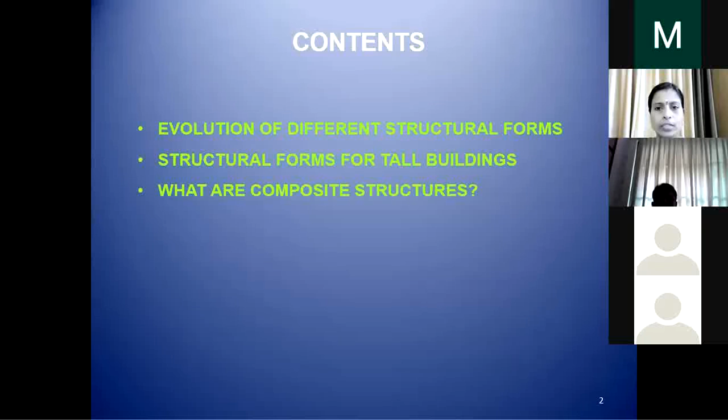There are different structural forms which have evolved from ancient times. And recently, the structural forms for tall buildings, because we are now in the process of constructing skyscrapers and other tall buildings, and we should know the structural forms which are being used for tall buildings. And what are these composite structures? What do you mean by composite structures? And what are the components? That is, what is a composite slab? What is a composite beam? And what is a composite column? And what are the other structural forms of steel concrete composite, like shear walls? We are going to see an overview of the different forms of steel concrete composite members.

Okay, so here you are seeing a reinforced concrete framed building, in which you have placed the reinforcement wherever it is necessary. For example, in order to take care of the tensile stresses, you place the reinforcements, and in some places like columns, we are putting reinforcements even to take the compressive loads. And then we go for casting of concrete, then we call it reinforced concrete. And with this, the construction has been carried out to match the number of stories required for these kinds of RC construction.

Okay. But there is some kind of limitation with respect to this reinforced concrete construction, because when we go for a high-rise building, then only the reinforced concrete columns or the reinforced concrete shear walls will not serve the purpose. When we go for more than 30 to 40 story height of the building.

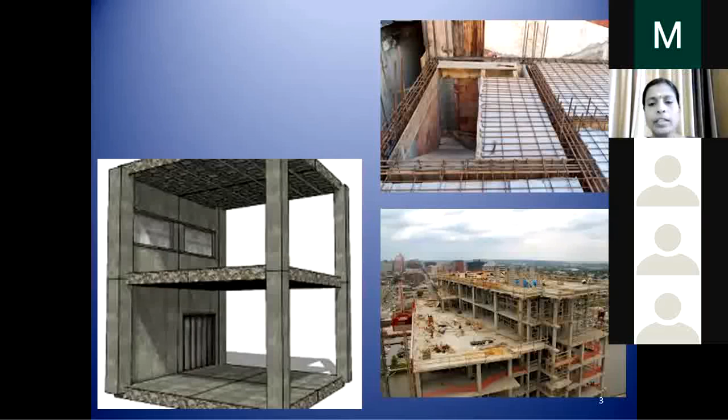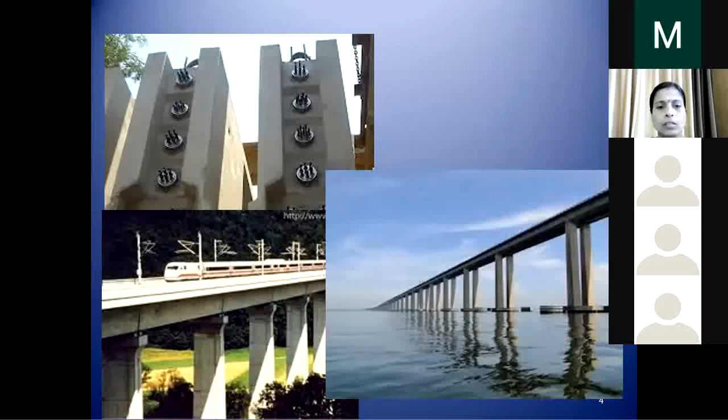So in those situations, we are going for a different form of construction called composite construction. Here is one more construction called the pre-stressed concrete construction, and this also gives us the freedom of achieving thin, slender, sleeker members than using reinforced concrete, by the process called pre-stressing. It can be post-tensioning or pre-tensioning, depending on the application and the requirement from the field. But today we are going to see only the steel concrete composite construction.

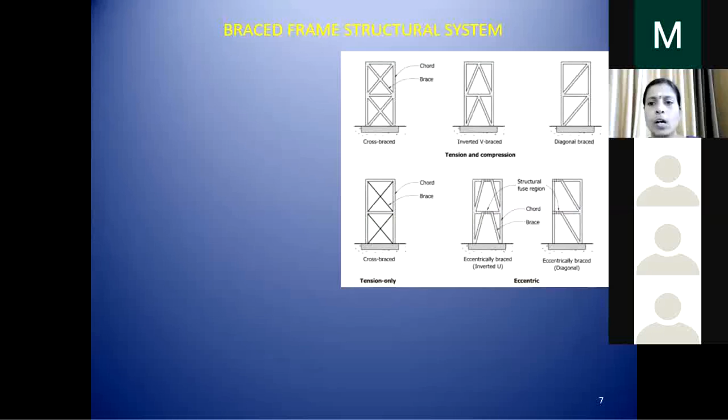These forms are generally used for tall buildings, that is, the skyscrapers. Before we get inside tall buildings, we'll see what systems or structural forms are used in tall buildings. These tall buildings can be either a cross braced building frame, or an inverted V braced building frame, or even a diagonal braced building frame.

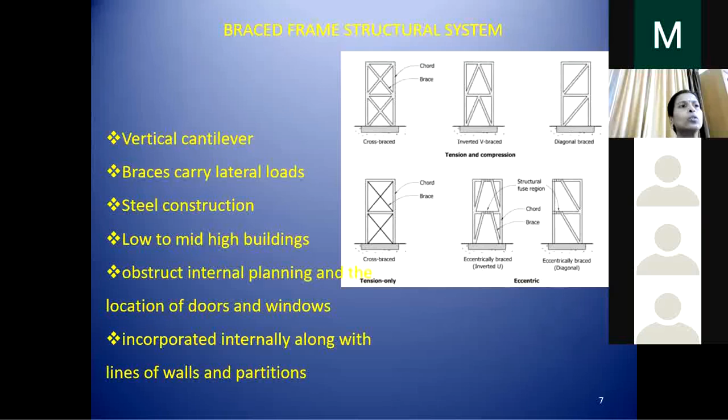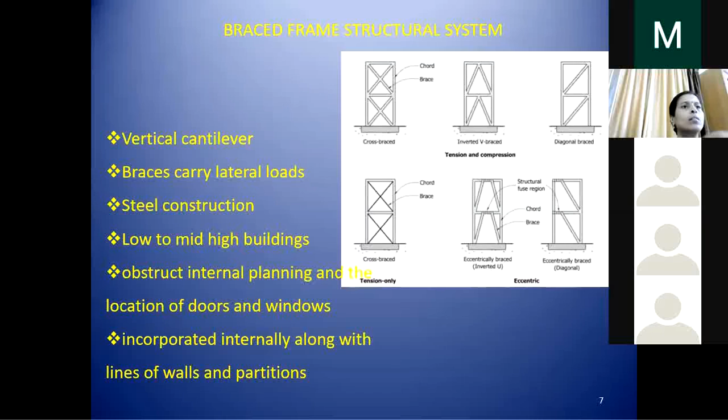These vertical forms act as vertical cantilevers, and the enormous lateral load induced by the wind is carried by these braces. The structural steel members take these lateral loads by means of the lateral bracings. These forms are suitable for low to mid height buildings, from 40 story to 60 or 70 story buildings. These braced frames are incorporated internally along the lines of the walls and the partitions.

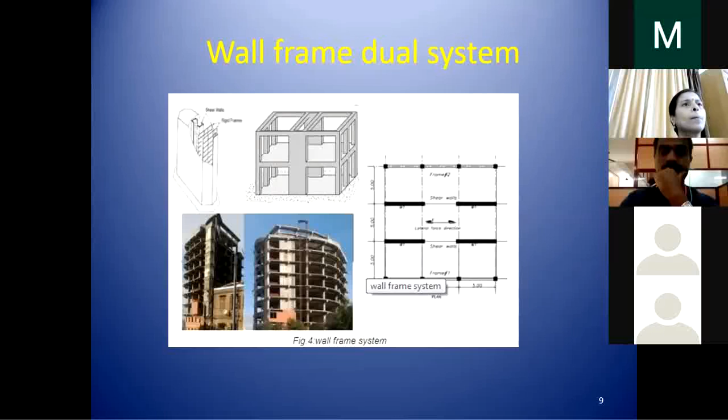This shear wall system is a very well known type of system, and it is even adopted in RCC frame structures. These shear walls are the lateral load carrying members which attract the lateral forces due to the seismic event as well as the wind forces. This one is the tube structural system. The exterior columns and beams are placed in such a way that they create a rigid frame, and it behaves as if it is a hollow tube.

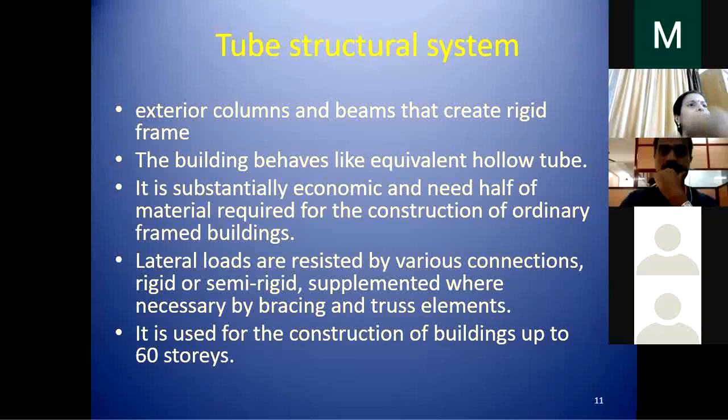And we all know the structural behavior of a hollow tube in resisting torsion as well as the twisting moment. So this behaves in a very stable manner, ending up with very good lateral load resistance by various connections, either rigid or semi-rigid. This tube structural system can also be supplemented with necessary bracing and truss elements if the design requires. This type of tube system is used in buildings up to 60 story. There are also bundled tube systems or trussed tube systems. For example, the tube in tube construction is provided with trusses along the tubes, so that the system becomes much more stable in resisting the lateral load.

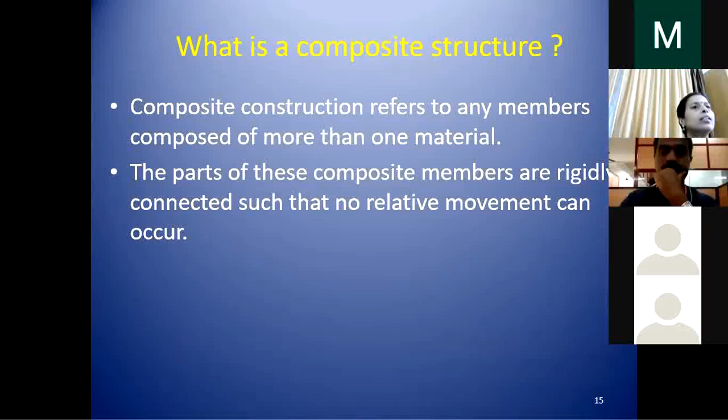Now, with that introduction on tall building configuration, what is a composite structure? When do we call a material a composite? When it is made up of more than one material. Here, by composite structure I don't mean reinforced concrete, because reinforced concrete also has two materials, reinforcing steel and concrete. Here I'm talking about two different structural forms: one is the reinforced concrete structural element, and the other is the structural steel element. The parts of these composite members are rigidly connected such that no relative movement can occur between these two members. That is called a composite structure.

So the definition states that composite construction, within the context of buildings and other civil engineering works, implies the use of steel and concrete which are formed together into a component in such a way that it results in an arrangement which functions as a single item. So you have a steel component as well as the reinforced concrete component, and these two will behave as a single unit, and that component or structure is called a composite structure.

So here the aim of combining these two structural forms is to have a higher level of performance than would have been the case with two different materials functioning separately. All of us know that reinforced concrete is good in taking compression, or we can design the reinforced concrete to take a good amount of compression, but in tension we have to rely upon the reinforcement, and when the tension exceeds a certain limit, those members cannot be designed in reinforced concrete. Then we go for taking the help of structural steel.

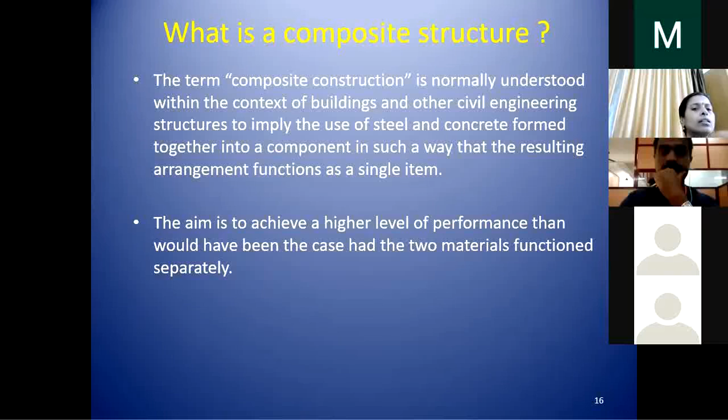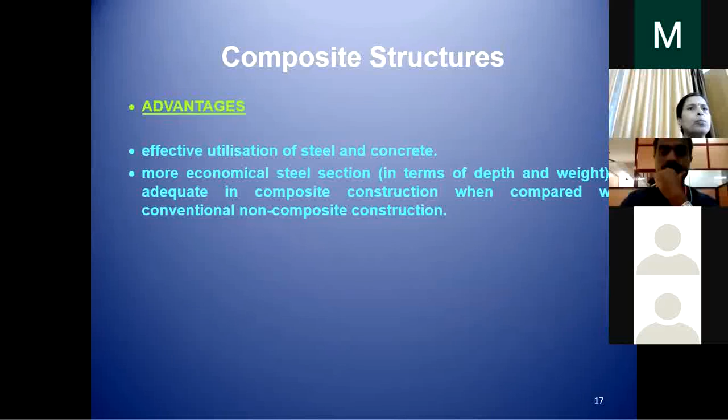So here the composite structures have many advantages. That is, they effectively utilize steel as well as concrete. Both materials, the structural steel and concrete, are effectively utilized in these composite structures. Hence, it ends up in a more economical steel section in terms of the depth as well as the weight, and therefore compared to a structural steel element, if we take advantage of the compositeness of reinforced concrete and steel, we can have a more economical steel section.

So for example, you may have a rolled I section for the beams, on top of which you may have a concrete slab, cast in situ, or sometimes a precast concrete slab. When this concrete slab, which is lying on top of the steel beam, is considered to act monolithically with the steel beam, then there is going to be adequate reduction in the depth as well as the weight of the composite beams.

Next one is the enhanced headroom due to reduction in the construction depth. For a given span of a building, if it has been designed with a composite beam, then there is going to be more headroom, and because of that your construction depth is reduced, and no formwork is necessary.

The previous work with respect to formwork, shuttering and other things is avoided, due to the composite action of steel and concrete. Due to the composite action there will be less deflection, and for a given span we can decide on a composite structure with smaller sections, more efficient in arranging the cover to a large column-free space.

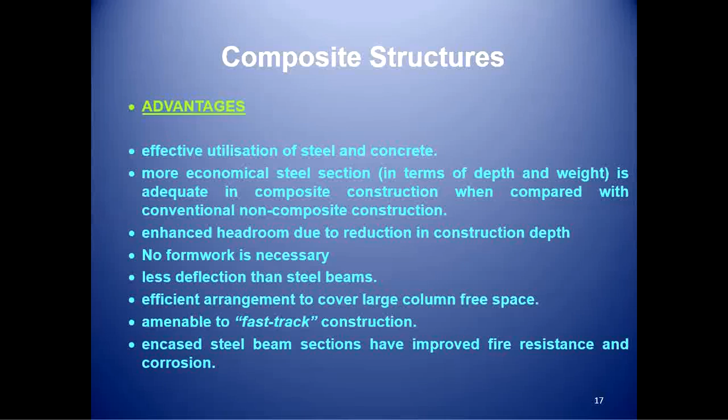So no formwork is required. I'll come to you why no formwork is required for these cast in situ slabs. And shoring can be avoided. Unlike your concrete construction, the entire shoring and shuttering can be avoided.

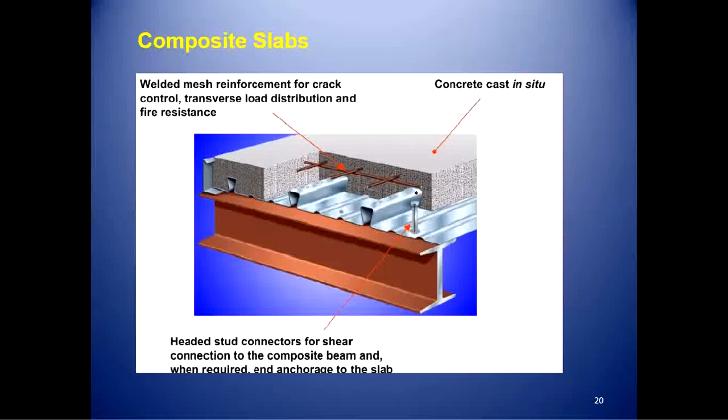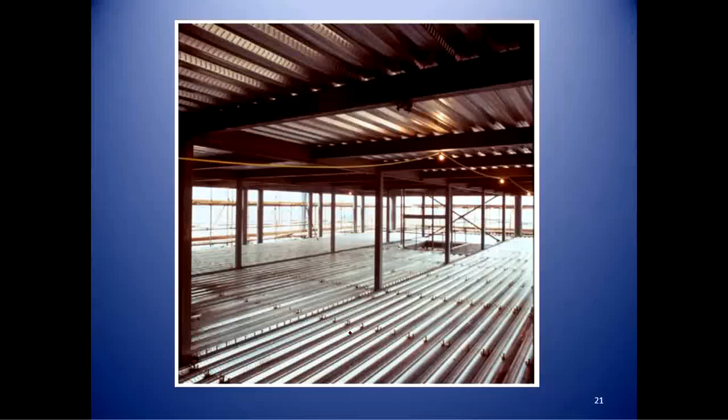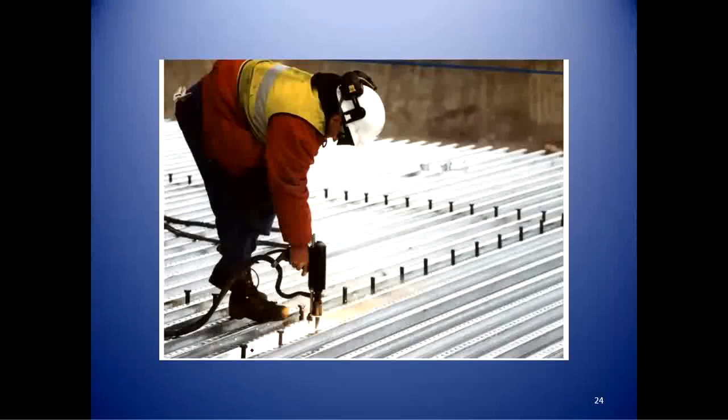So here, this picture is showing you metallic shooting guns, like welding guns. These are all the metal shooting guns, which are useful for installing the metal shear connectors, or the studded shear connectors with the headed studs. So you shoot it at regular spacing intervals, and these shear connectors will be placed on top of the flanges of the steel beams. It will pass through the metallic decking and then be placed on top of the steel beams.

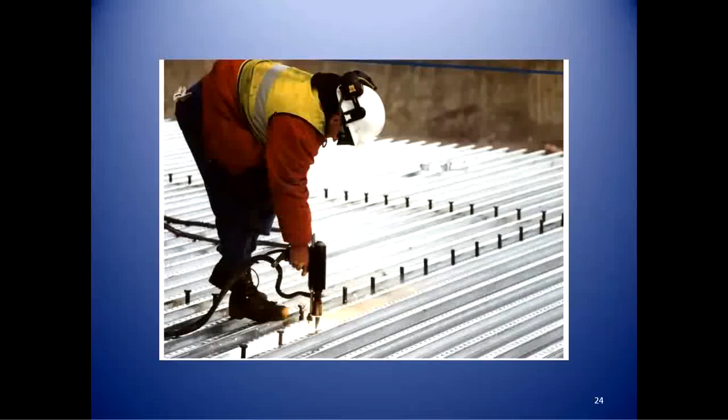The thickness of these metallic steel sheetings will be only in the order of 0.9 to 1.2 millimeters. So they are very, very thin metal sheets, but the moment of inertia is higher due to the folded forms. Hence, it is able to serve as a permanent formwork for placing the fresh concrete on top of it. And here you can see that the space provided below the metallic sheeting can be used for taking up the service ducts.

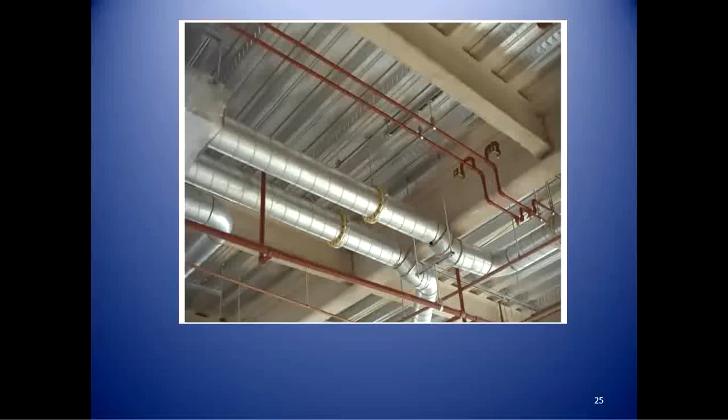So here the entire depth, the full depth of the concrete slab, can be considered when the ribs are running parallel to the beam. Whereas when the ribs are running perpendicular to the beams, you cannot ensure that the entire depth of the concrete slab is participating in the composite action. So there is a reduction factor given in the code of practice in order to account for these ribs which are running perpendicular to the cross sections. So the design has to be done accordingly, whether the ribs are running parallel or perpendicular. Accordingly, the beams have to be designed carefully.

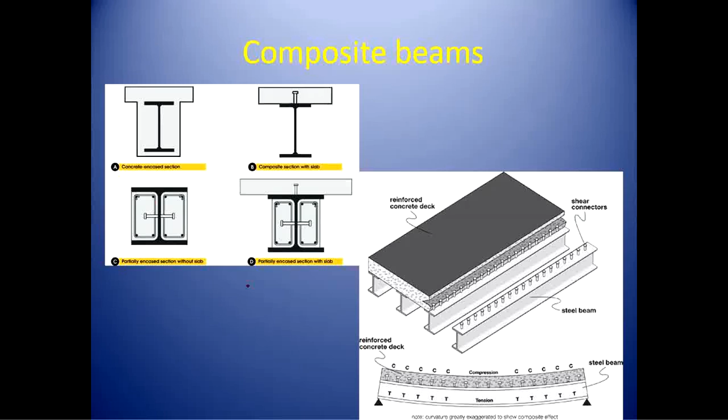So this is another partially encased section without the slab. You see here, this dark one is your structural steel, and this web portion is filled with the concrete, and this is your shear connector, which is placed in the web portion, whereas here you can see the shear connector is placed on the flange portion, and here the shear connectors are placed in the web portion to have a proper interaction between the concrete and the structural form. So this is one picture which I already discussed, how we are placing the studded shear connectors.

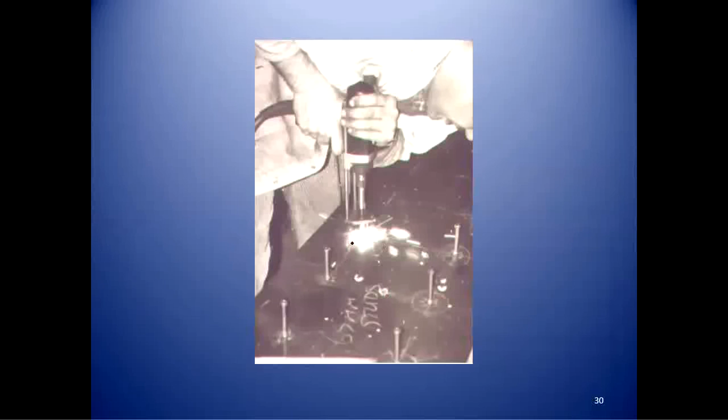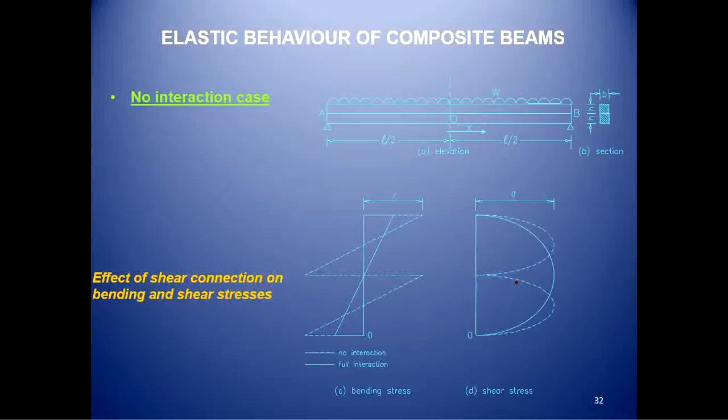Suppose there is an elastic behavior of the composite beam, then the maximum bending stress is given by 3WL squared by 8BH squared, and the shear stress is given by 3WL by 8BH. I think with the basics of your structural mechanics,

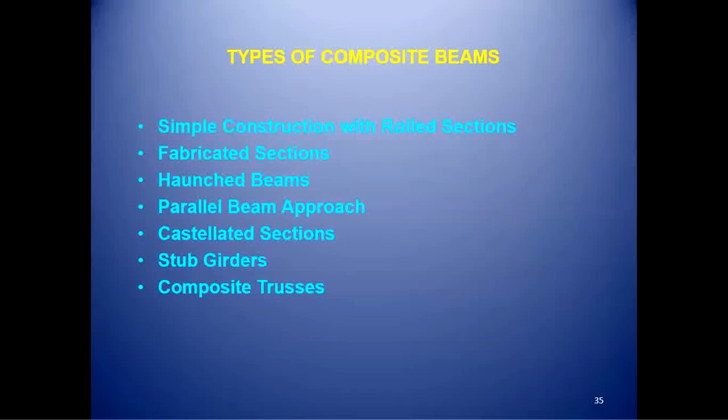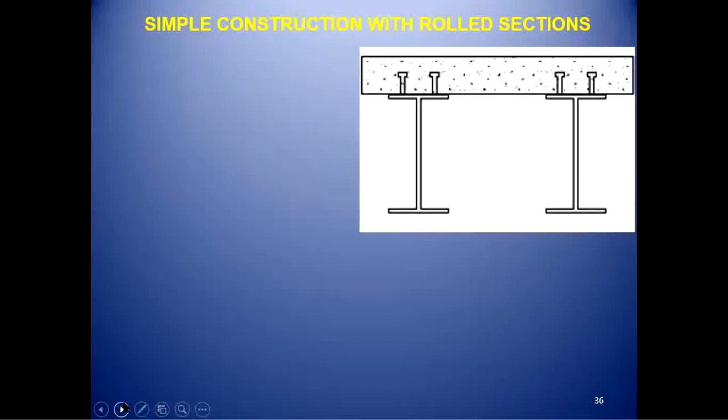So apart from the composite beams with the rolled sections, we can also go for composite beams with fabricated sections, or with haunched beams, or with parallel beams, or castellated sections, and other kinds of stub girders and composite trusses. This is a simple construction with the rolled section. The rolled sections which are available in the market are used as steel beams, on top of which you place the concrete and provide shear connectors in order to serve the composite action. And these are all the simple construction with the rolled sections.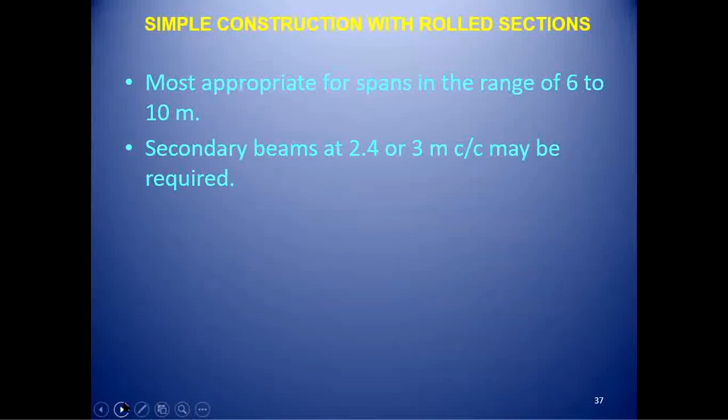These are more suitable for spans ranging from 6 to 10 meters, and they require secondary beams at every 3 meters center to center in order to serve the design. Next, we can go for fabricated sections. Fabricated sections can be either a straight taper or a semi-taper as shown here. It can be a straight taper, a semi-taper, a crank taper or a stepped beam.

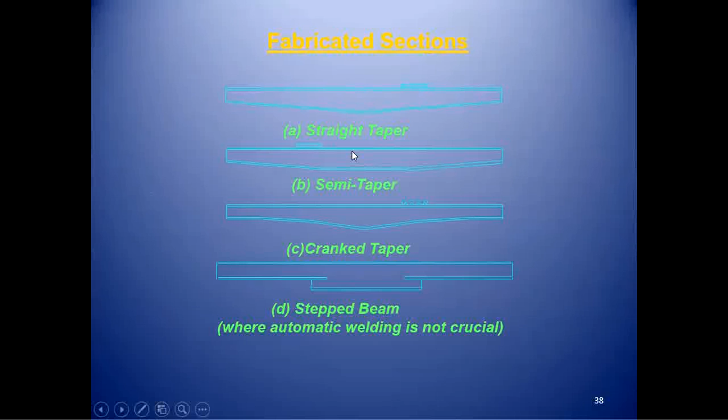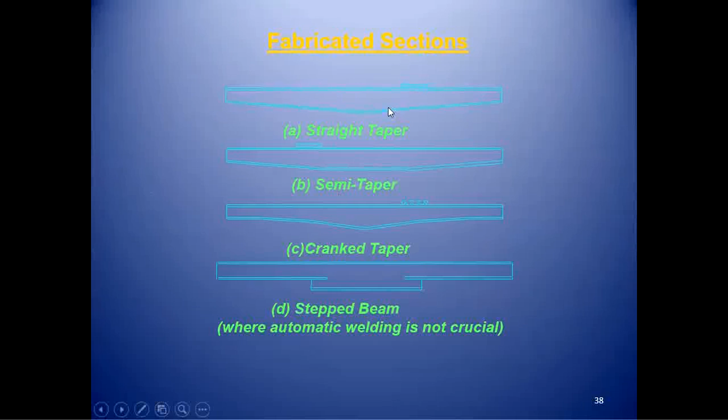So we can go for fabricated sections when the rolled sections available in the market are not meeting the demand. With fabricated sections we can achieve economy in the design, but the only thing is we have to order these materials from the shop and then procure them. That would increase the construction cost a bit.

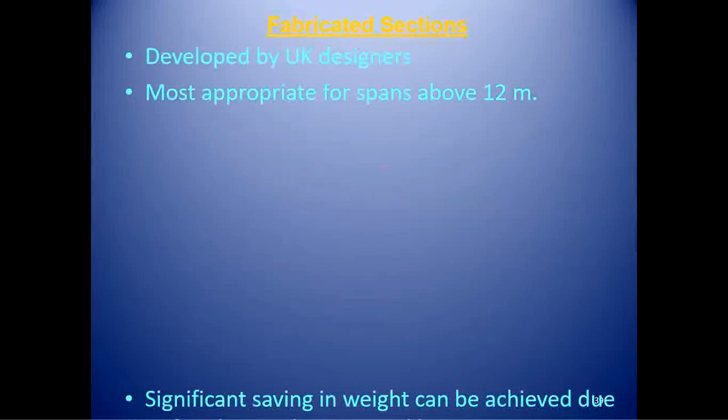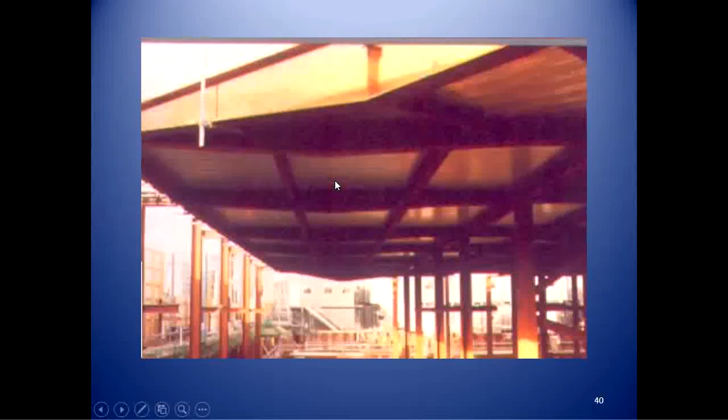So these fabricated sections are more suitable for the spans above 12 meters, and a significant weight can be saved due to the cranks and the fabrications. So this picture shows you how the crank sections or the fabricated sections are used in spanning larger spans beyond 12 meters. So these are haunched beams.

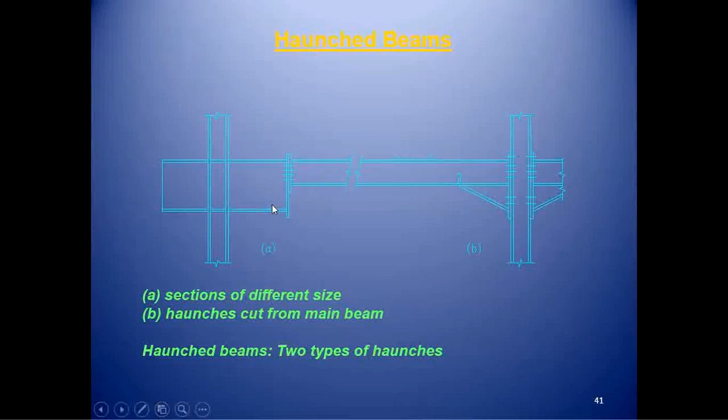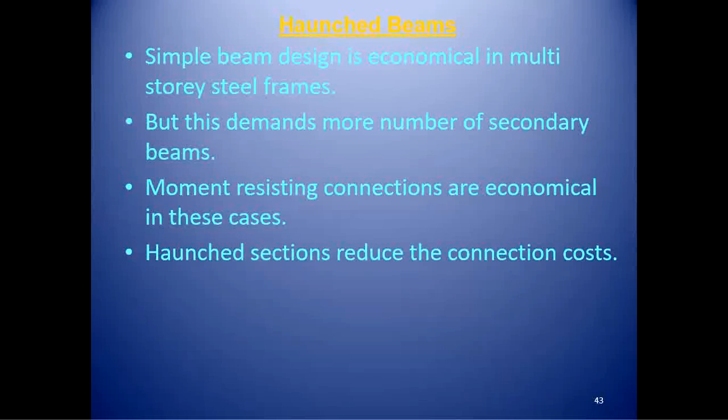You can have two different types of haunches. Either you can have a tapering or you can have a stepped haunch, something like this. This picture shows a haunch section with the tapered haunching, and this is suitable when we go for moment resisting connections. When the simple beam connection is not economical, then you have to go for moment resisting connections. Under these, you can go with the haunch sections in order to reduce the connection cost.

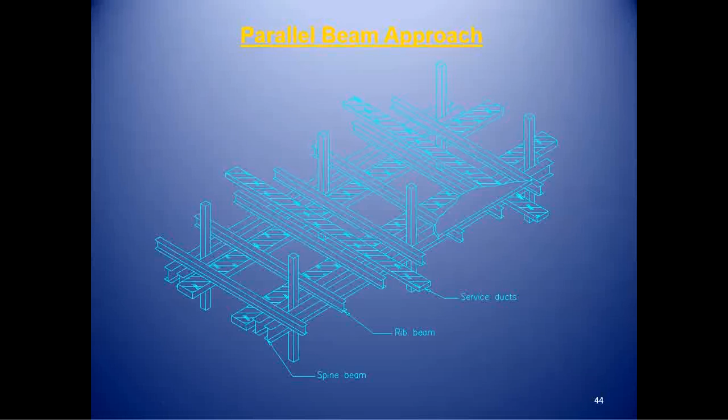And the next one is the parallel beam approach. This is a simple approach in which, instead of running a deeper single beam, we can place two shallow beams in parallel. Instead of running one single deep steel beam, you can have two shallow steel beams, and that is again going to serve the practical purpose. The design is also going to be served, and you will end up having more headroom space.

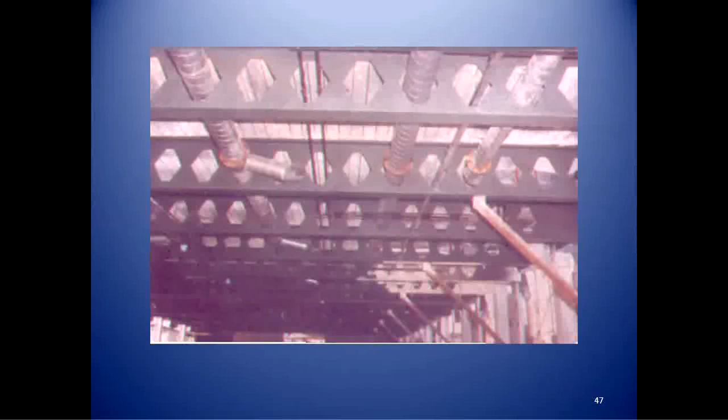Next is the castellated sections, which are made from hot rolled steels. You can have these castellated sections with either circular openings or any other shape of openings, and these openings can serve as service ducts for any service lines, electrical lines or AC lines or any other lines. These web openings can be taken as service ducts. So this is a castellated section with a hexagonal web opening.

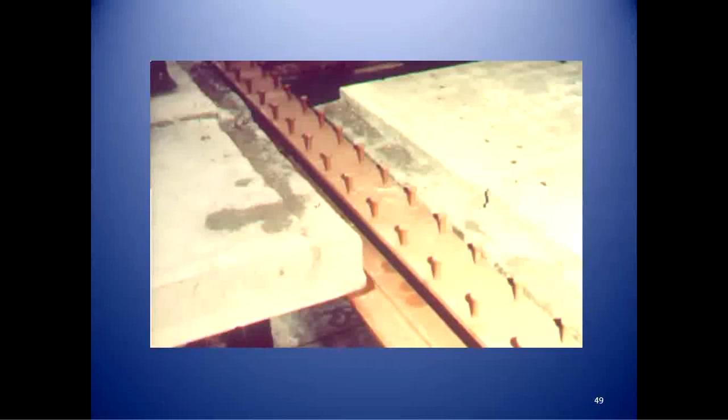Okay. And here you can also go with precast slabs. You can place some precast slabs, which can be post-tensioned or pre-tensioned slabs, and then in situ concrete is placed in the joints alone, and that is going to serve the monolithic action between the concrete slab and the steel beam. So these are some of the pictures where the composite beams are adopted.

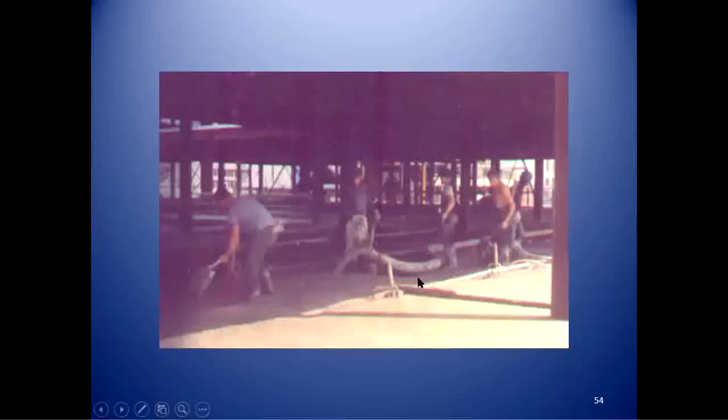Here you can see that the structural forms, that is the metallic forms, are acting as the permanent formwork. You see that people are standing over it, the concrete pumps are placed here, and some concreting is going on. So you don't need any temporary shuttering. And here again, you see this pipeline is pouring the concrete, and some people are standing on that metallic form without any disturbance.

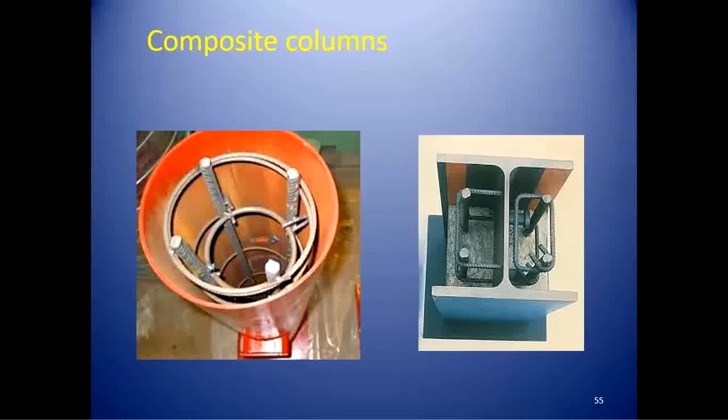Okay, so with that introduction to the composite beams, now we will see what are called composite columns. This picture is showing you a composite column. There are several forms of composite columns available. The first one is the concrete filled hollow tubes. You see a hollow tube here. The hollow tube can be rectangular, square, circular, or anything like that. This can be filled with concrete inside, and this is acting as a composite column. So this is one of the concrete filled hollow sections.

And sometimes you can also go with fully or partially filled concrete columns. This is an example of a partially filled concrete encased column. This I section is the steel member, which is acting as a structural steel column, and the web portion is filled with concrete. The first purpose is to serve the required degree of fire resistance. The required degree of fire resistance can be achieved only when you are filling it up with concrete, and even the corrosion resistance is obtained just by filling it up with concrete. So it is going to serve a dual purpose.

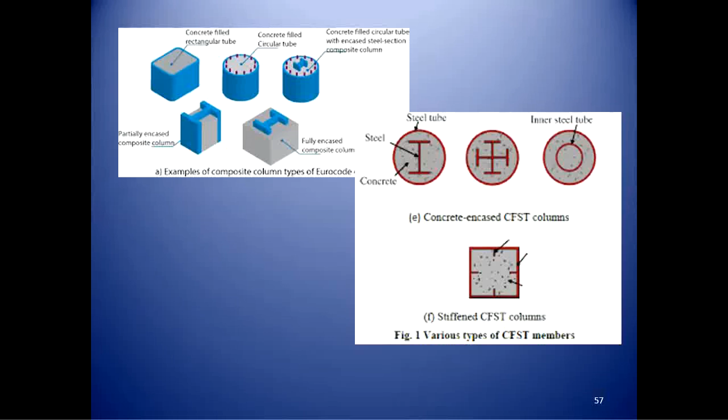So this is what I told you, the double skinned CFST columns, concrete filled steel tubular columns. You have one outer steel tube and another inner steel tube, and this annular space is filled with the concrete, and the inside core is left hollow. And here the idea is that these two tubes are confining the annular concrete, and this confinement is able to achieve a larger stability as well as load carrying capacity. The tubes can be either square inside a circular tube or circular inside a square tube, or we can have any combination of such double skinned CFT columns.

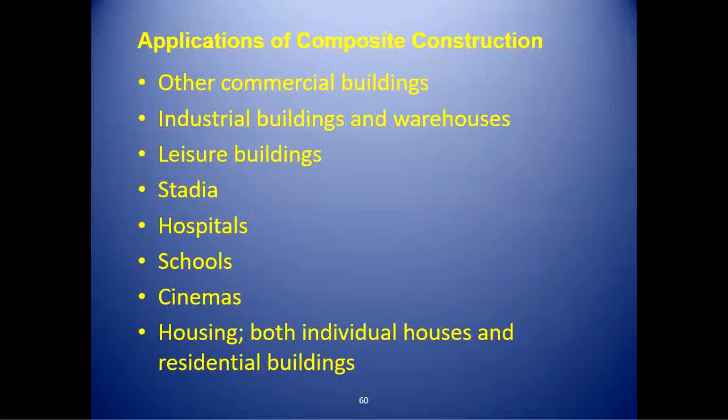Okay, so the composite construction can be applied in any kind of commercial building or industrial building, any buildings. But the application of composite construction is not so popular in the Indian scenario. It is because there is a lack of awareness as well as a lack of standards with respect to the Indian scenario. As far as India is concerned, we have IS 11384. IS 11384 is the only code which discusses steel concrete composite construction. This code gives only the design of shear connectors, for beams and then slabs having no degree of interaction or a complete degree of interaction. So the code gives only limited options, or the guidelines are only limited with respect to the Indian scenario. Hence, steel concrete composite construction is not so popular in India.

Whereas in other countries, steel concrete composite construction is so popular. For example, Eurocode 4 talks extensively about the design as well as the construction of steel concrete composite buildings. Similarly, ACI 318 reference 5 is also giving a different kind of solution for steel concrete composite buildings. And there are other standards available, like in Singapore and Korea. But the Indian standard is giving only a very, very limited guideline, and that is not a complete guideline available in India. But I heard that this IS 11384 of the Indian code is getting revised, and a good number of guidelines are going to be available to us also.

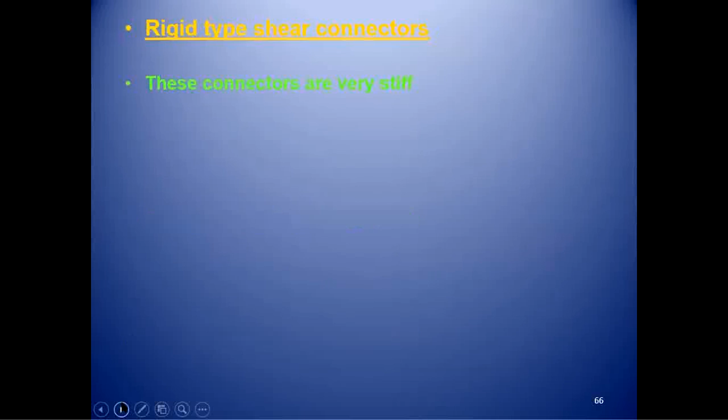Okay. So rigid type shear connectors, these connectors are very stiff and they sustain only a very small amount of deformation while resisting the shear force, and they derive their resistance from the bearing pressure on the concrete, and finally they fail due to the crushing of the concrete.

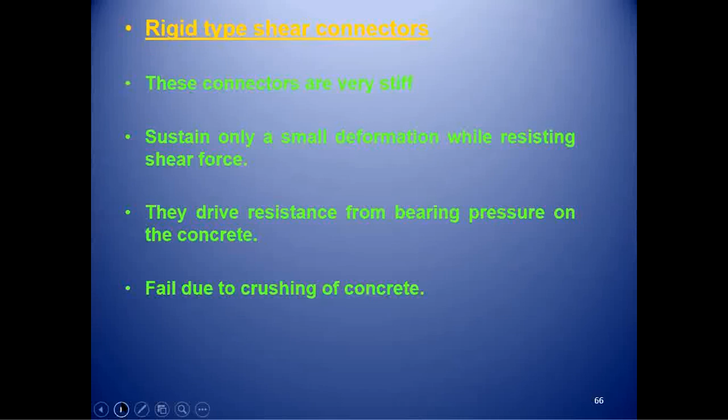It is something like a similar analogy I can give, like an over-reinforced beam. In an over-reinforced beam, finally the failure is due to the crushing of the concrete, and the steel reinforcement would not yield, as well as it won't undergo any large deformation before failure. A similar kind of analogy is applicable here in the steel shear connector or the rigid shear connectors.

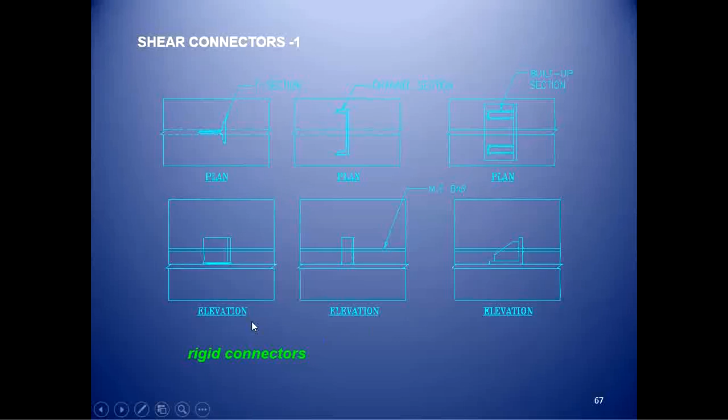See here the elevation of the section is welded at the bottom. And the next one is a channel section. You take a piece of a channel section and place it in this format and weld it all around, and that is also going to act as a shear connector. Or else we can go with the built-up sections, with a combination of a bracket and angle sections like this. You can go for either a single bracket or two brackets with the built-up section and weld it on top of the I section or the steel beam, and they act as rigid connectors.

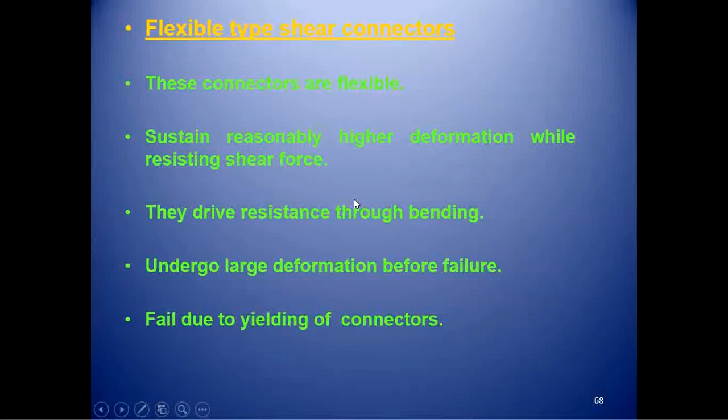Apart from these rigid connectors, we have a flexible type of shear connector, and as the name suggests, they are flexible by themselves and they sustain a higher deformation while resisting the shear force, and they derive the resistance through bending. They undergo a large deformation before failure, and they fail due to yielding of the connectors, similar to an under-reinforced beam. Under-reinforced beams undergo a large deformation before failure due to yielding of the steel. Similarly, here the failure is due to the yielding of the connectors. Connectors are made of steel and they undergo a large deformation before failure, and they derive the resistance through bending, and they sustain a reasonably higher deformation before failure. And this is called a flexible shear connector. Predominantly, flexible type shear connectors are used in practice.

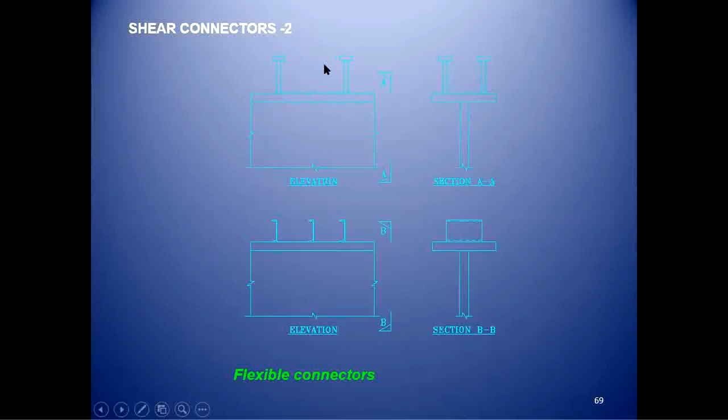So this picture again I have taken from IS 11384, the code of practice for steel concrete composite construction. So here you can see the channel sections, only one side of the flange of the channel is welded on top of the steel beams, and you are placing it at regular design intervals, and this is acting as a flexible shear connector. And this top picture shows the studded shear connectors, which are more commonly used in practice. And these are two examples of flexible shear connectors.

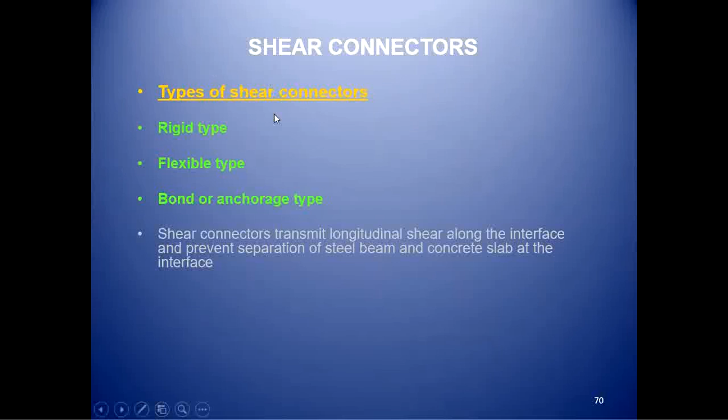Okay, so the third one which I told you is the bond or anchorage type. This shear connection comes from the bond between the fresh concrete and the metallic decking, or by means of any anchorage mechanisms. You can have any type of anchorage mechanism, like cables or bonded wires.

I think the slides are repeating. Let me pass.

complete guidelines on the design of steel concrete composite elements. So there are lots and lots of lacunae in the Indian standards. It talks only about simply supported beams, and beams without any metallic decking, and only for beams with 100% interaction. Achieving 100% interaction is not possible practically. So we have to depend on the Eurocode or AISC 360, the American standard 360 2010. Either we can follow Eurocode or the American standards as of now. Once the revised version of IS 11384 has come out, then we can follow our own Indian standards. The next form of steel concrete composite is the shear walls.

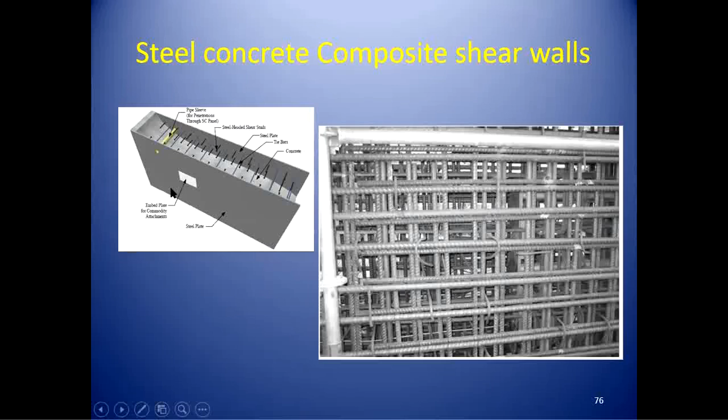So this is another major area of research which is undergoing, in which you go with the steel concrete composite shear walls for taller buildings. This picture shows how much of the reinforcement is placed inside the concrete shear wall. On top of that, we have to pour concrete and see that the concrete is getting inside these intricate spaces, and then you get a reinforced concrete shear wall. With this kind of detailing, it is better to go with the steel concrete composite shear walls, so that we achieve economy in the design.

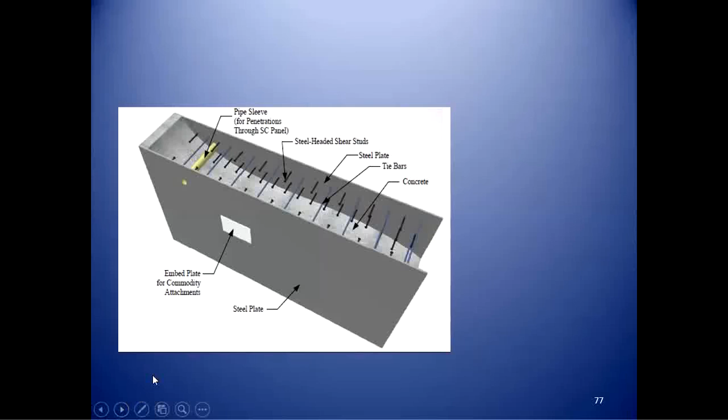Okay, so this is the representation of the steel concrete composite shear wall. Here you have one piece of metal and another piece of metal, and these two pieces are placed together by means of tie bars, which are welded inside the metal pieces, and you have steel headed shear studs placed on both the metallic pieces. Then you can have an embedded plate for attachments and other things, and a pipe sleeve for penetrations through the steel concrete composite panels. These panels have to be customized according to the configuration of the building, and then you place them in position and pour the concrete in between them. And this is another form of steel concrete composite construction.

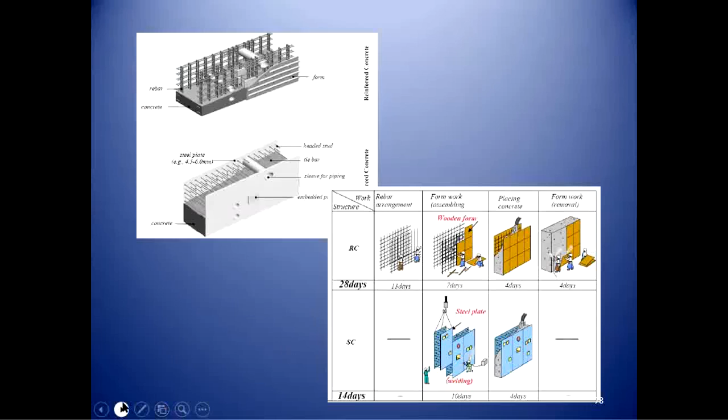These are some pictures where we have the steel concrete composite shear walls. This can be fabricated and taken to the site, erected in position, then pour concrete and leave it. The other form is a composite truss, where instead of the structural steel beam running at the bottom, we can have trusses running at the bottom, and these trusses will support the concrete slab at the top.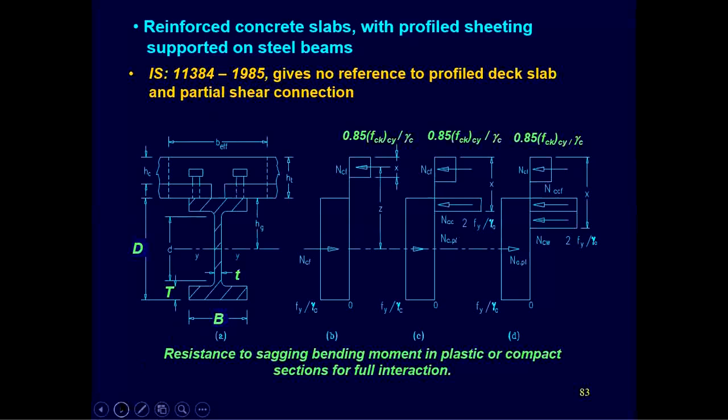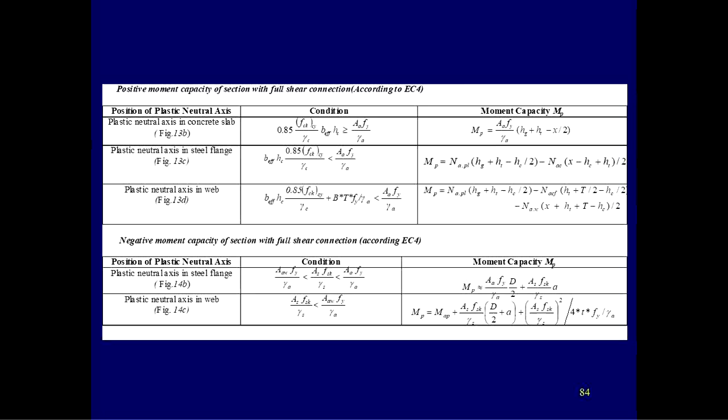IS 11384 is giving some design guidelines without giving reference to profile decking, and it is also not talking about any partial shear connections. Whereas there is a difference between the Indian standards and the Eurocode. The Eurocode is able to give you a different range of shear connections possible, from partial shear connection to full shear connection, whereas the Indian standard is silent about partial shear connections.

So this is a simple design as per the Indian standards. Here again I repeat, it is silent about the degree of shear connection. It assumes a full shear connection between the concrete and the steel.

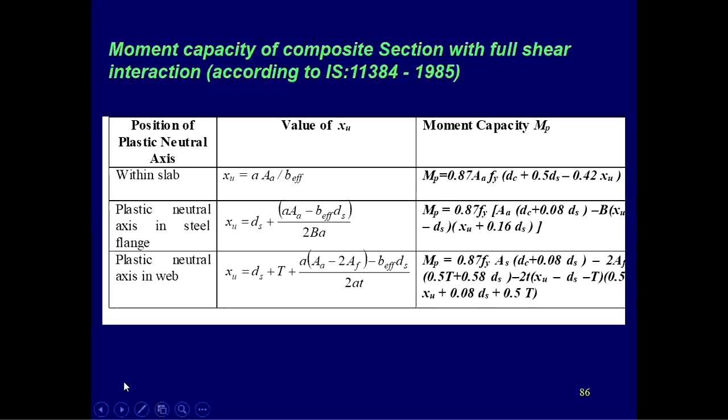How much more time can I take? I have a few more slides on seismic resistant design. How long can I take?

Ma'am, up to 11 o'clock. Up to 11 o'clock. Okay then. Then I have 20 minutes. Okay, 10 more minutes. Yeah, ma'am.

Okay. So then I'll proceed with the earthquake resistant design of steel concrete composite structures. As far as the earthquake resistant design is concerned, Indian standards are silent. Eurocode 8 gives you a complete design concept on how to design steel concrete composite construction buildings. So it is adopting three concepts.

The first one is concept A, which is a low dissipative structural behavior in the composite building. Or you can have a dissipative structural behavior with composite dissipative zones, or a dissipative structural behavior with the steel only in the dissipative zones. So this third concept is where we are not considering the participation of concrete in the dissipative zones, which means the composite structure is something like a steel structure. The composite action of the concrete is not considered in the zones of dissipation.

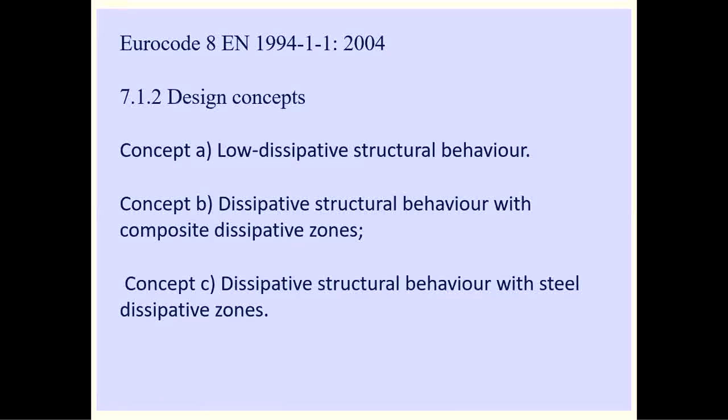So whenever we design with this concept, the design rules applicable for steel buildings are applicable in concept C. Whereas in concept A, where there is a low dissipative structural behavior, these forms are not suitable in places of higher seismic vulnerability. So we have to concentrate much on concept B, where the dissipative action is expected from the composite behavior of both steel and concrete.

There is a range of the behavior factor given for composite behavior in the Eurocode. Just like we have the response reduction factor in Indian standards, there is a behavior factor q given in the Eurocodes for seismic resistant design of composite sections. The structure is classified under a ductility classification, either low ductility, medium ductility or high ductility. If it is a low ductility classification, then the behavior factor is taken as a value of 1.5 to 2.

And again, there are some configuration related issues, and depending on these, there will be a further reduction in the behavior factor. But at any point of time, the behavior factor is not taken less than 1.5. And for the medium ductility as well as the high ductility classes, you can have behavior factors less than or equal to 4, and it is again limited by the various structural forms which are given in Table 7.2 of your Eurocode.

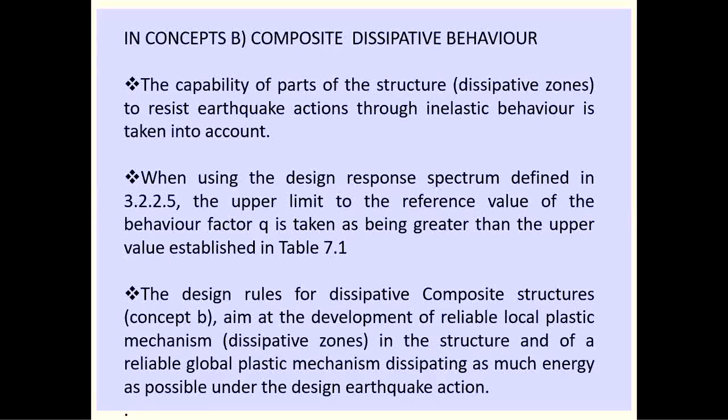So in the design rules for dissipative composite structures, we aim at developing a reliable local plastic mechanism in the structure, and therefore we have to go for a reliable global plastic mechanism dissipating as much energy as possible in the earthquake action. So this you can decide based on your pushover analysis.

Here the Eurocode is telling us to prescribe concrete of a grade not lower than C20/25 and not higher than C40/50. This grade C20/25 is nothing but concrete with a cylinder compressive strength not less than 20 and a cube strength not less than 25. Similarly, C40/50 means 40 represents the cylinder strength and 50 represents the cube strength. And again, the reinforcing steel should be of class B, that is medium ductility or high ductility steel, whenever we are utilizing steel concrete composite buildings in zones of higher seismic actions.

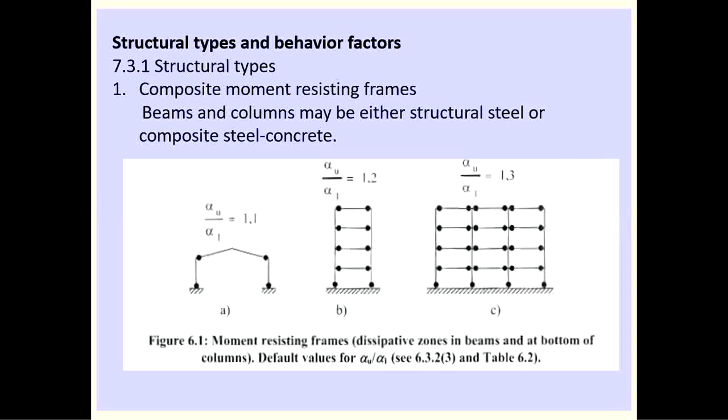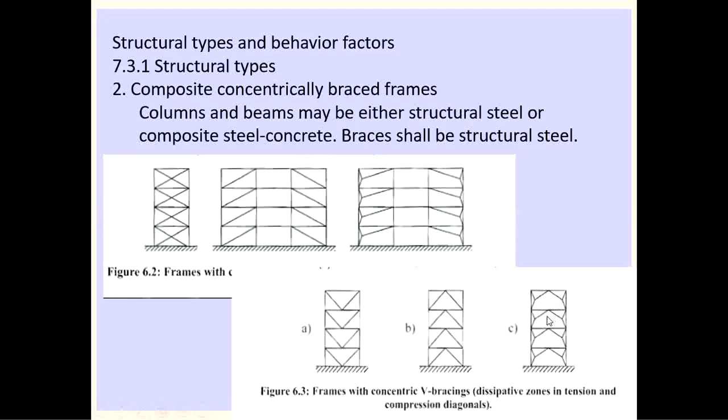And these bracings, we can have either V bracings with dissipative zones in tension, and compression diagonals, or any other forms of the bracings shown here. But at any time, if you have frames with eccentric bracings, then the dissipative zones in bending or shear links should be provided. So this is very important, that is the composite eccentrically braced frames.

But at any cost, these K bracings, in which the intersection of the diagonals is lying on a column, should not be used. Here you see that the intersection is lying on the columns. So it is weakening the columns. The columns are not designed as the dissipative members. Therefore, such a configuration with the K bracings should not be used in steel frames or steel concrete composite frames in seismic regions.

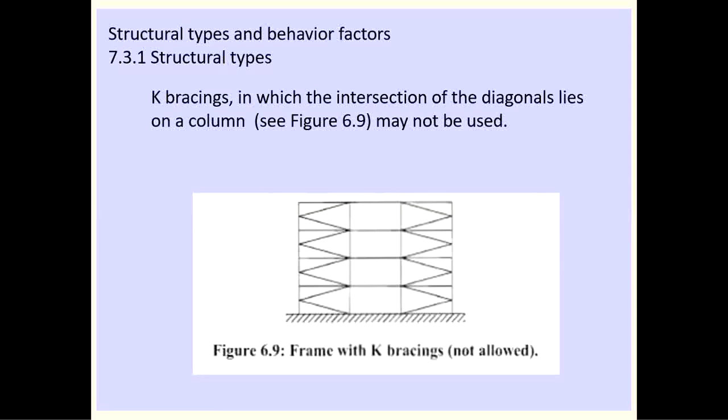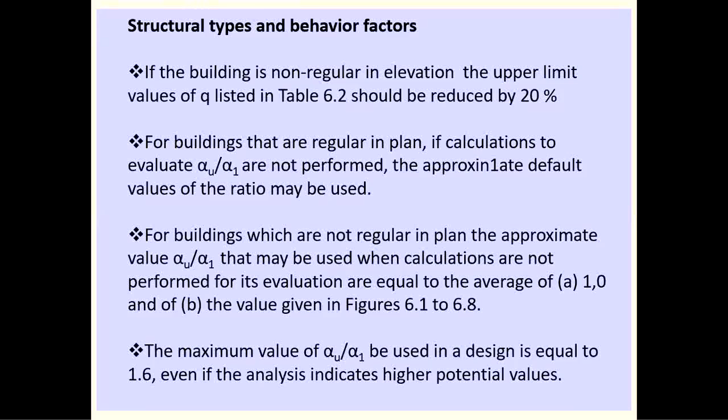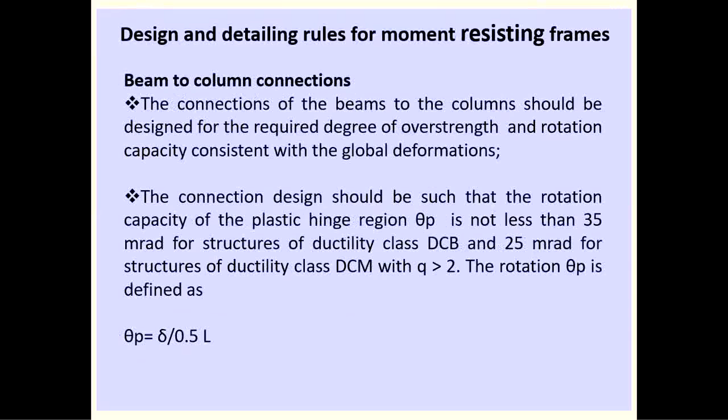And these are all the other composite structural systems, and the different behavior factors for the different structural systems are given. But how to design the seismic links is itself a lecture of its own kind, so I'm just passing on that due to lack of time. These seismic links can be a short link, long link, or an intermediate link. And again, guidelines are there on how to design these links and the rotation capacity of these links are given.

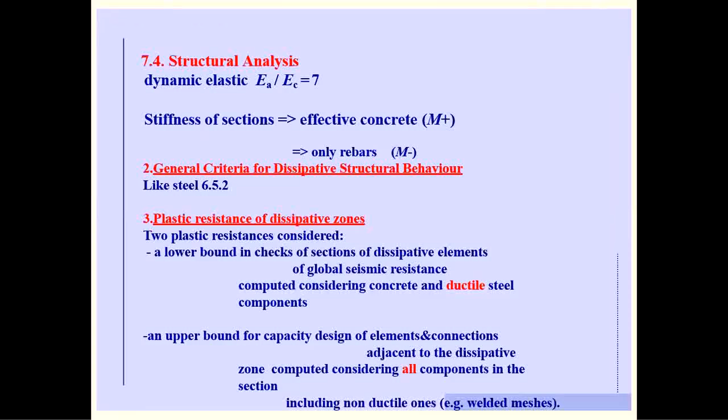Okay, so with that, I stop my presentation. Any questions, any queries? I would be happy to answer. Now it's time for discussion. If you have any doubt, please ask, participants. Please unmute your mic and ask your question. Any doubt? Participants, please ask your doubts. I'm requesting the participants to ask some questions. I think the topic was too boring.

Okay, madam, I have a question. My name is Rema Devi, I'm working in Muthoot as faculty. What about the cost compared to RCC? Yeah, cost will be higher compared to RCC if you are applying this kind of technique for low-rise buildings. But if it is a high-rise building beyond 30 to 40 stories, then the cost will be lesser compared to RCC. Okay, thank you, madam.